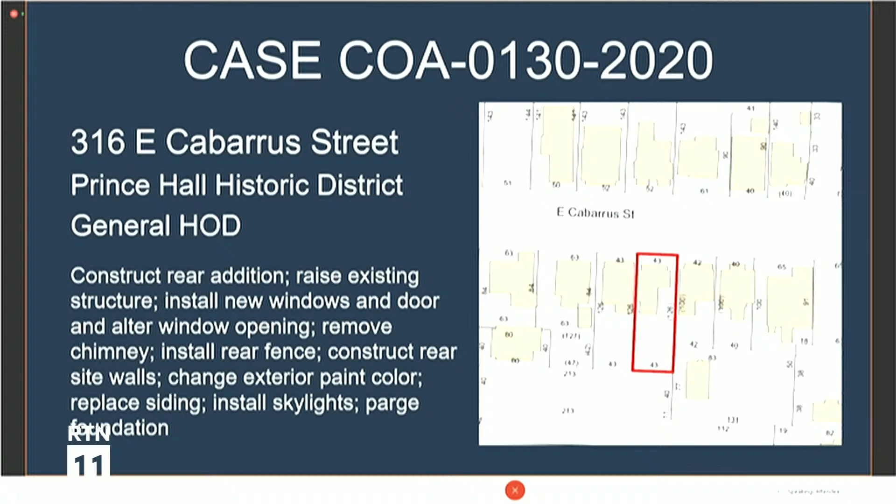This is a view of the existing structure from East Cabarrus Street. This is a view of the west property line side elevation. This is a view of the front and east elevations of the existing structure.

This is a view of a piece of the rear of the original house and the L addition. This is an early addition, and what you're seeing are the remnants of a 1950s addition that was removed by a previous owner prior to this application. Next, a view of the rear lot where you can see the significant grading changes that we'll be discussing tonight.

Staff suggests discussing the following: irreparability of all historic wood siding, bold contrasting finish colors on the addition, relationship of solids to voids in the new addition, the monolithic treatment of the addition's gable ends, extensive regrading in the rear yard, and congruity of the rear concrete terracing. Also, congruity of the green roof, congruity of the screened courtyard and plantings, and the increase to built area and built mass, and to defer the application to allow the applicant time to provide additional evidence and respond to committee comments.

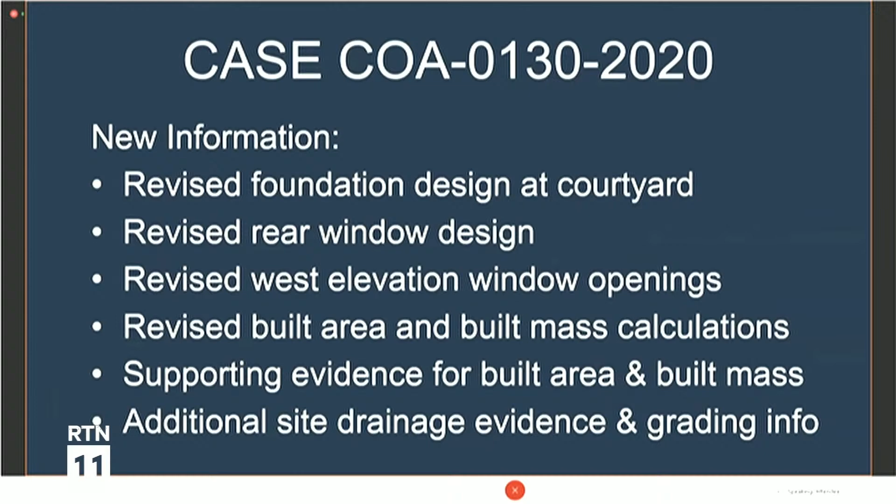That's all from the initial staff report. The applicant has provided several new revisions in response to those comments and comments from DRAC, including additional isometric views of the site, removal of the rear concrete terracing from the application, a revised front door design, original wood siding retention information, revised addition roof trim details, revised foundation design at the courtyard, revised rear window design, revised west elevation window openings, revised built area and built mass calculations, additional supporting evidence for built area and built mass in the historic district, and additional site drainage and grading information.

The applicant has a presentation for you as well.

At this point, is staff nevertheless still suggesting the matter be deferred for additional comment or additional time for the applicant? I feel that a number of the comments have been addressed with the new information, and if the committee is comfortable during the discussion, we could find a way to make a decision. Okay, thank you for that.

Mr. Barnes, Mr. Hoffman, who wishes to speak next? This is Zach Hoffman here. I'll start and run through the presentation. I believe I'll turn it over to Mr. Barnes at the end of it. Thank you for that. Please proceed.

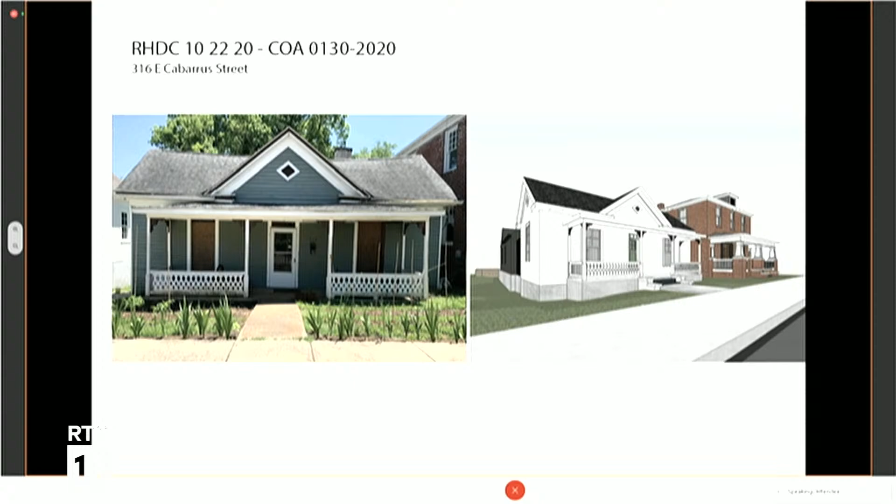On behalf of our clients and us here at In Situ, thank you for your time tonight. I will try to be very brief. We've provided a bunch of information and tried to respond to COA comments from last month, conversations we had with DRAC, and a series of conversations we've had with RHDC. Next slide, please.

Just real quickly, I wanted to give updated aerials of where we're at. You will see a lot of these changes in the updated elevations, but to highlight a few, we've stepped in the courtyard space to provide a clear distinction from the original house. We've also tried to divide the rear south-facing bay window into 3 divisions per DRAC comments, and removed terracing walls. Next slide, please.

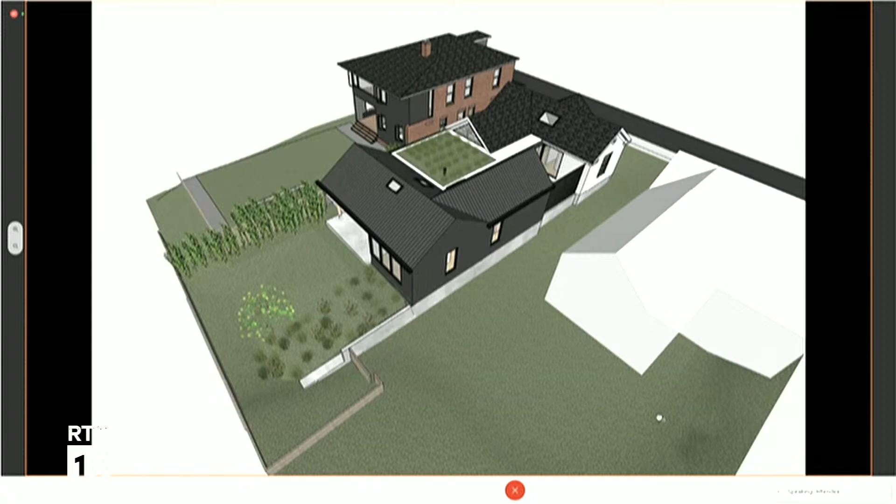This is a view from the northeast. You can see the green roof tucked in between the addition and the original house. Just wanted to provide this shot as a good part of this. The discussion tonight will be around the green roof. Next slide, please.

These are just 4 elevations coming up over the next few slides that replace the original submission. This highlights a change to the front door, working with staff to redesign to something more period appropriate. We've switched to a solid door with a single panel that has a 2/1 window in the top. Next slide, please.

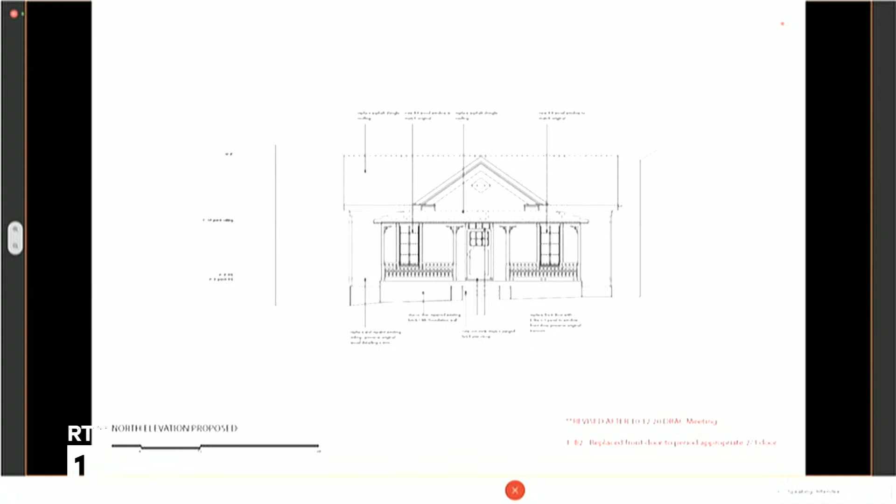This is the east elevation showing the step in at the courtyard. We have introduced trim details reflecting a minimal traditional flat trim style at the request of DRAC along the addition's gable ends, and we've stepped the extension of the foundation wall so there's a distinction between the addition and the site wall. Previously, we had the vertical siding running all the way up to the roof finish, and we've introduced a flat trim style in concordance with the minimal traditional style that was built around the first quarter of the previous century, as a nod towards the original style while also providing a distinction.

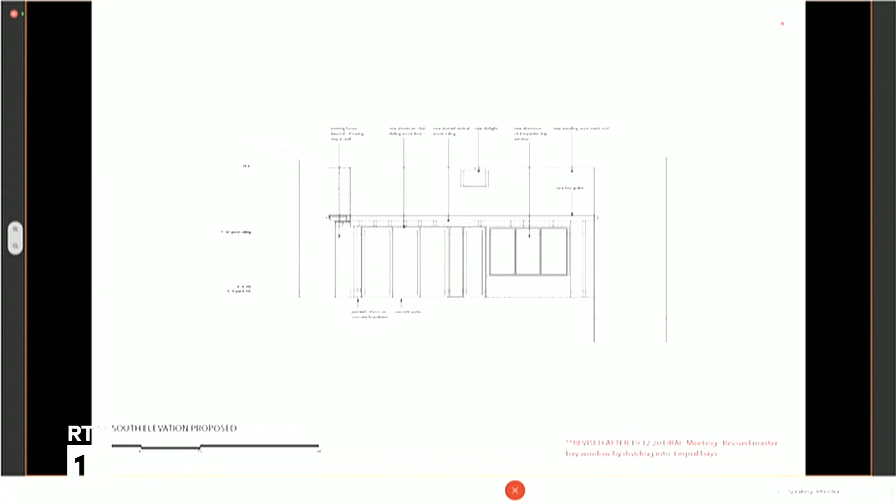The main change on this elevation is highlighting the large piece of glass that was in the master. The bay window has now been divided into 3 distinct divisions. Next slide, please.

On the west elevation, one of the comments we received in DRAC was about a portion of wall from the gable end extending all the way to the ground, and we have introduced that on the north side of that gable end. This also reflects the new trim style along the gable. Next slide, please.

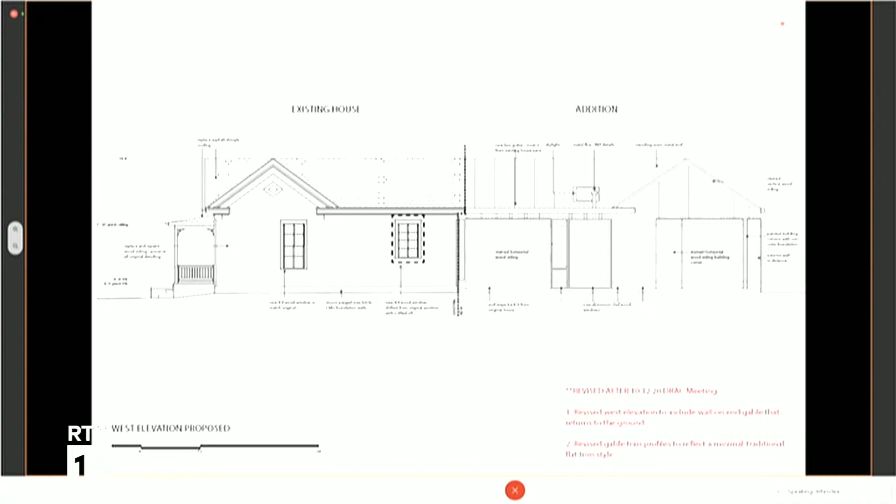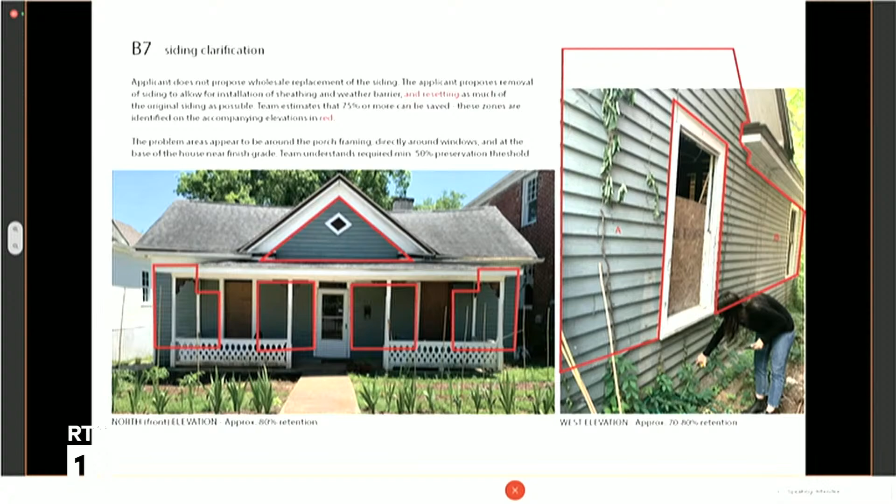One thing we wanted to clarify in our application, which we were probably unclear about previously, is the discussion around the existing siding. Our goal is to keep as much of the siding as possible. We expect that somewhere in the neighborhood of 75% of the original siding can be saved. The request we were making in the application is not to dispose of it, but to take it down, apply plywood for lateral stability, and add a weather barrier, which the house currently does not have—adding life to the siding and preserving health and safety for the clients as they renovate. These next few slides just show large batches of areas that, after an inspection, we believe could be saved.

The next thing we wanted to discuss was that, at the request or suggestion of RHDC, we looked into the Sanborn maps to look at the original house. It turns out that the original house, prior to the 1950s addition, had an additional room right to the east of the L in the original house, and also a shed on site. So our calculation of built mass for the original house is a little different than it was last month.

This is just showing 1909 and 1914 respectively. Next slide, please. So this is showing, to the best of our ability—obviously the Sanborn maps are slightly different each time, but we scaled it up—we estimate there's about an additional 325 square feet or so of built mass from the original house. That brought our current built mass up to 22.4%.

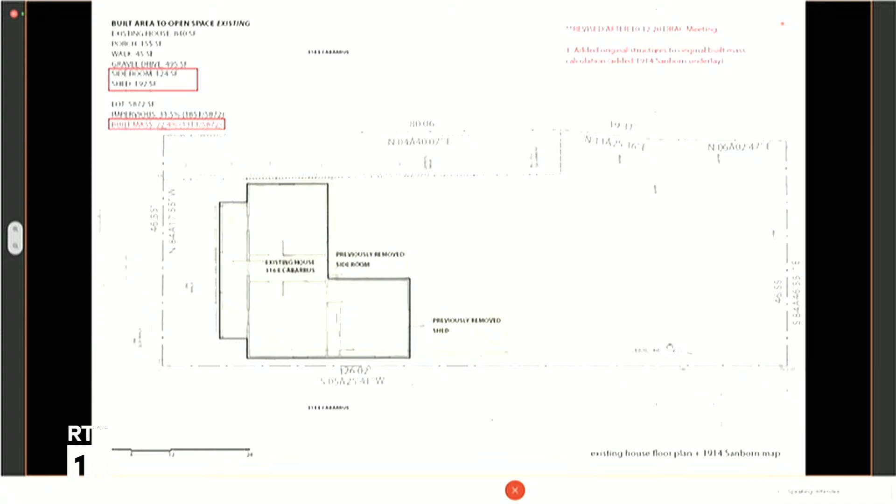Next slide, please. So we did revise the built mass for our proposal as well. We removed the terrace walls from the calculation. We did add the retaining wall, which we had forgotten to include previously, and then we added the courtyard, since it is lifted, to the built mass calculation, bringing our total up to 41.7%.

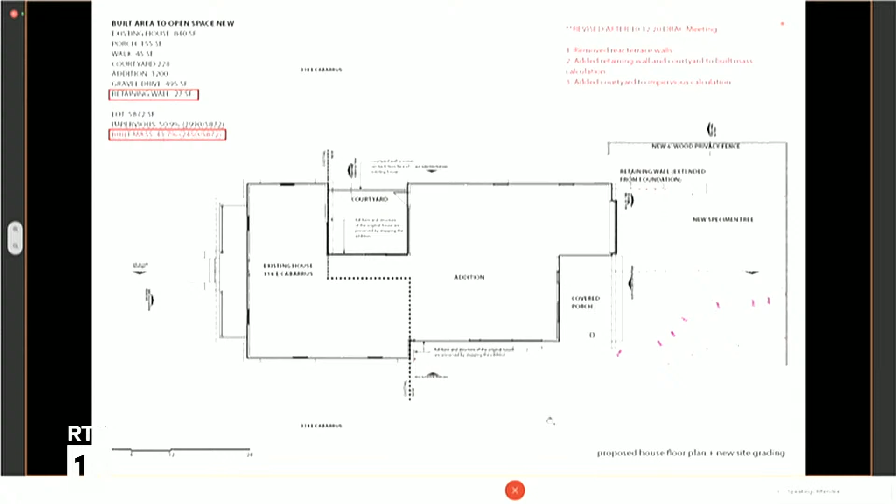Next slide, please. So at its worst case, at 41.7%, we started looking in the district for comparable conditions where built mass occupies somewhere in the neighborhood of 40% of the lot size. We found 4 examples nearby. The 2 houses to the east of us, prior to the addition, had something in the 30s, and are both somewhere in the 40s after the addition. So that's in line with what we're proposing.

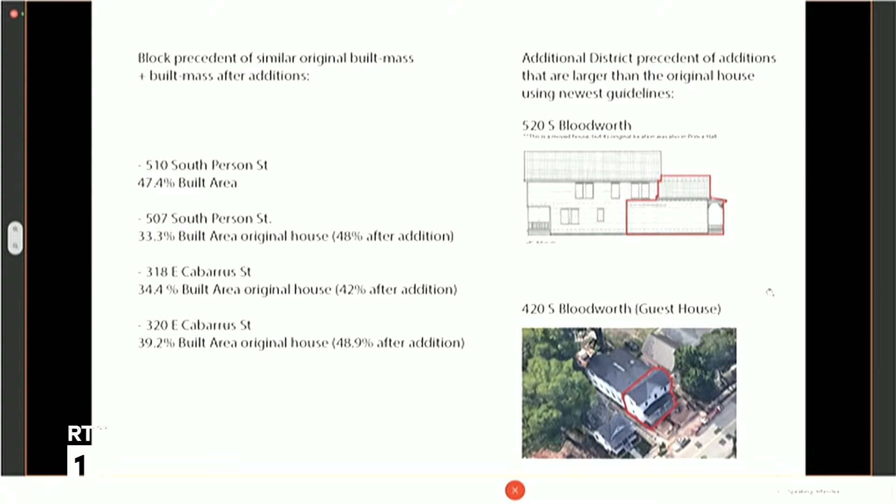Also along Person Street, just to the west of us, there were 2 properties where the original structures held upwards of 40% built mass. The 2 examples on the right are examples in the district where an addition is larger than the original house. The asterisk on both of these properties is that they have been moved to their current locations. We acknowledge that, but 520 South Bloodworth was only moved 2 lots down and has always been in Prince Hall Historic District. Next slide, please.

So this is getting into some of the built mass calculations and our conversations at DRAC. One thing they thought we could consider is the green roof and courtyard space as offsetters of the built mass of the home. Our intention with the addition from the beginning was to mimic the form of the original house and provide flat roofs to connect the two volumes, so that the clarity of the original house could be seen, but also so that the addition would be comparable in scale and size to the original house. We didn't want to provide something for our clients that was much larger and out of place.

So with the green roof and courtyard accommodating those square footage changes, we end up with about a 10% reduction in the visual representation of the built mass, bringing us somewhere around 33%. And as I mentioned at the beginning, this was at the suggestion of DRAC. Next slide, please.

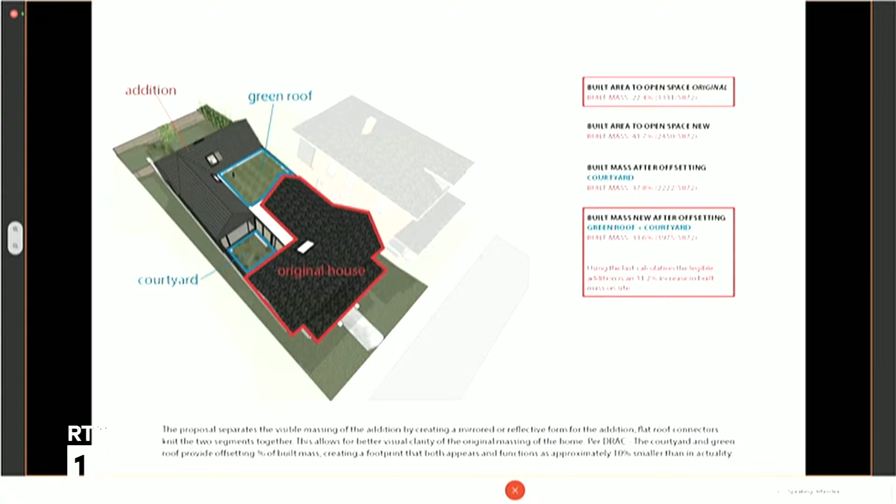So going into a little more detail about the green roof, I know staff has concerns primarily because there's never been a green roof approved in the historic districts before, and we acknowledge that, and we're hoping we could be a good precedent for how you could do this in the future.

We did want to point out that modern sustainable tech has been approved in the district before in inconspicuous locations with solar panels, so this is just a different avenue to pursue sustainability. Our hope with the green roof and courtyard, as Richard will speak to, is to handle a lot of the site water and runoff and control it, contain it, and use it rather than continue to exacerbate problems happening between the two houses.

We're about 2 feet off of 318, and there's a large gravel driveway that currently collects a ton of rainwater between 316 and 318 and delivers it to a pond location at the bottom of the hill. With the way we've pitched the roofs, the courtyard, and green roof, we can collect somewhere between 50 and 75% of all water that hits the house, and we plan to have a cistern in the crawlspace that handles this.

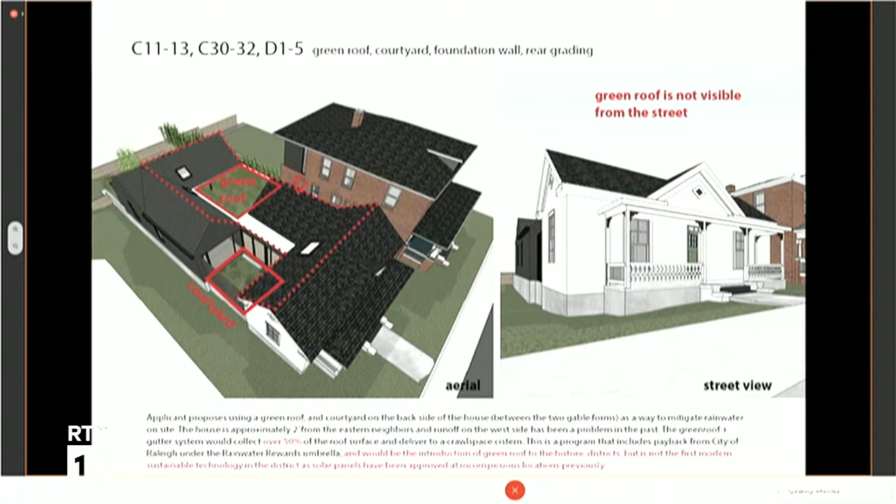This is just a shot of the courtyard. It's about 230 square feet. It would collect water through a French drain system and take it to the cistern as well. The courtyard also provides an opportunity for a hyphen between the original house and the addition, and we propose a wood screen to maintain privacy that's set below the water table, so the original form of the house remains the distinct character, and it could be removed at any time down the road.

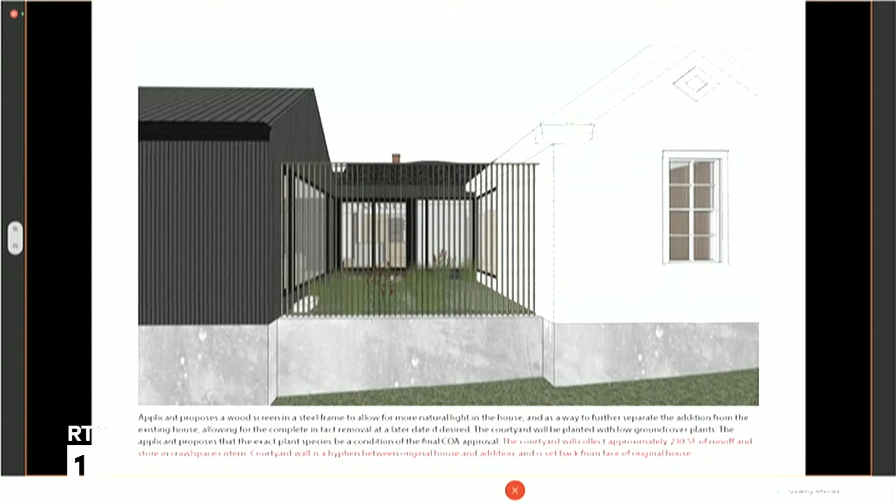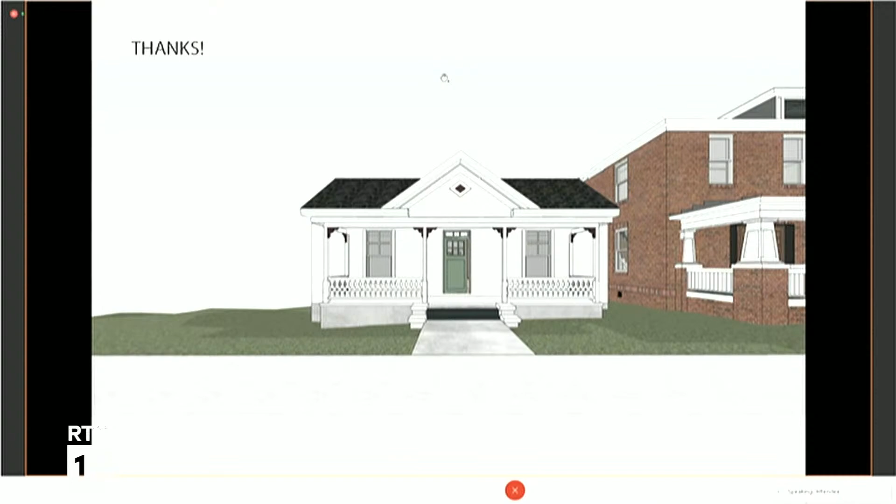And with that, I want to just thank you guys again for your time, and maybe slide it back up two images to the pictures of the area ponding and turn it over to Richard. Thank y'all. Oh, one more down from that. Yeah, either slide is fine.

Let's see. Yeah, my name is Richard Barnes. I'm the homeowner at 318 East Cabarrus, next door to this project. I'm a general contractor in Raleigh. I've been building homes and renovating houses in Raleigh for about 20 years now.

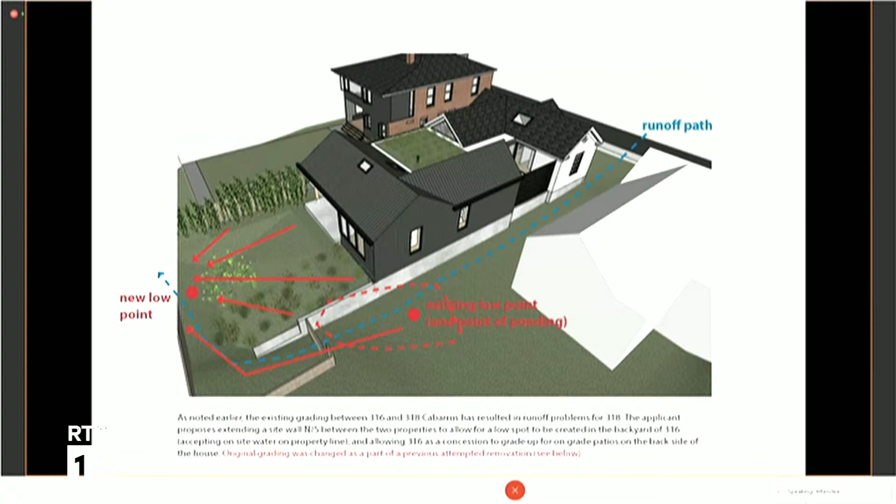So it's not going to end up in the basement of either house. And that's all I have. I'm here in support of the project and the mitigating factors they're proposing to reduce the rainwater runoff, the courtyard and the green roof, and the extension of the retaining wall in the back.

Thank you for that. With that, we'll turn to questions for Mr. Hoffman or Mr. Barnes or Aaron from members of the committee. Who has a question? Ian Dunn, I saw that hand first.

What happens to the water once it reaches this low spot? I think the hope is that increasing the built mass contains more of the water that hits the property in general. Obviously, anything running downhill is going to find the lowest spot, but we are hoping that at a future stage, the plantings in that area would allow essentially a bioswale, the opportunity to hold water and release it at a slower speed into city drainage.

And mainly the stuff through the house, collecting in the cistern and using it on site. Okay, thank you for that. Further questions, Ian? All right, nothing. Versailles Height, you had questions?

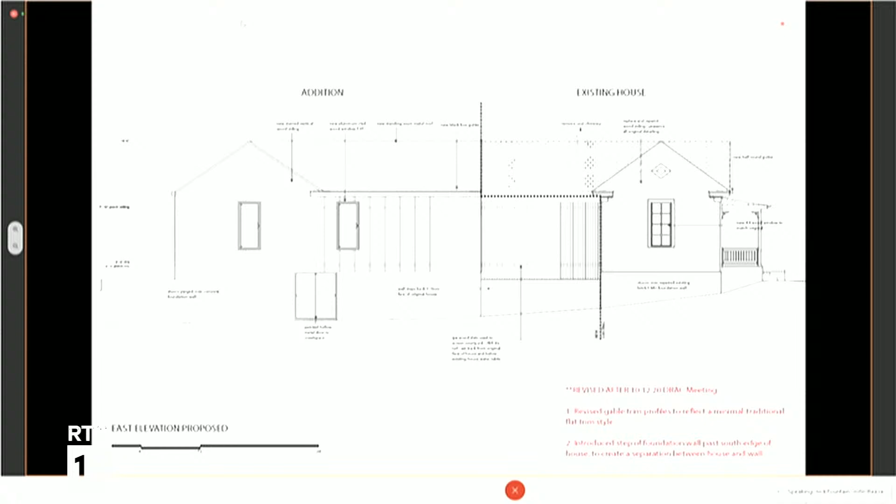Right, no, I was thinking about how much of that do we really have to have? Exactly. Okay, I got that. Because everybody's seen all of that they want. And we can pull that down.

At some point, I want to put back up the one that shows the green roof and the courtyard so that we can have that discussion. Are there further questions for that? That's Ian Dunn.

In regards to the siding, I'm glad that y'all are taking steps to save the siding. Have you explored ways to insulate the building without taking the siding off? You taking it off causes me pause, as I don't want to end up in a situation like a ship of Theseus, where everything's taken off and at the end of the day only half a dozen original boards are put back up, but you can say it has original siding. So have you explored ways to do it without taking the siding off?

I know it's possible. We have consulted across the industry as well as with building scientists about possibilities of insulating from the interior using something like closed cell foam. The problem with closed cell foam is it would trap moisture between the foam and the siding, shortening the life of the siding, but protecting the folks living there. We have explored other options, I think an open cell foam or putting a weather barrier on the inside. All of these have mainly impacts to the health, safety, welfare of the owners.

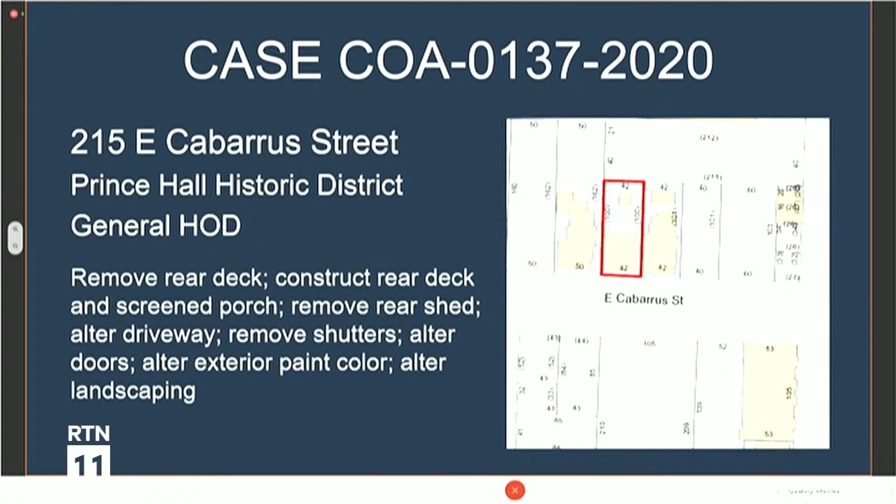This is a photo of 215 East Cabarrus from the street. A view of the driveway side, which is the east elevation. And the current existing condition of the side, well, the driveway's deferred, so we won't focus on that. This is the west elevation of the property.

And the rear, you can see the existing deck on the back of the house. And a full view of the rear elevation of the house. And the existing shed located near the rear property line in the backyard.

And the applicant made us aware that in the course of some of the renovations, siding replacement has already begun. This is considered routine maintenance at this point to the existing structure. Staff suggestion is to discuss the merits of a 365-day demolition delay for the removal of the rear shed, and to approve with conditions.

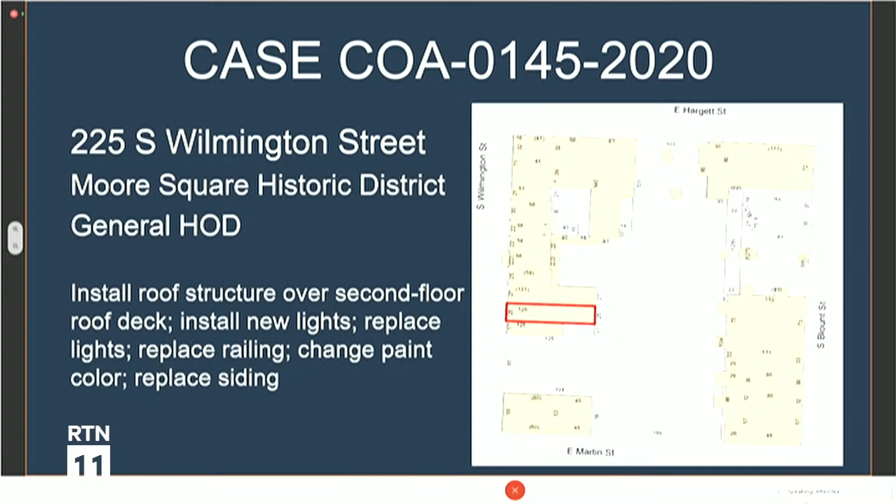Next slide. This is a view of the property from Wilmington Street. Next slide.

So across the street, a little further down, this is a view towards the property. It is not the building immediately on the end, it's one in. This is to illustrate what you can view of the roof area, which is part of your discussion. Next slide. And then this is another photograph a little closer, also across the street. The building in question is the second in.

So staff's recommendation is to discuss the visibility of the proposed canopy structure and whether or not it compromises the character of the historic district. Pending the results of that discussion, approve with conditions. There was some information provided, which you should have seen. These address some of the concerns mentioned in the staff report - drawings illustrating visibility and photographs from Wilmington Street.

Okay, who would like to speak first for the applicant? I will. This is Meredith Kirkpatrick. I provided the additional building section, sightline section from the street, and also the photographs from Wilmington Street to address staff's comments about visibility and to indicate that it is not visible from the public right-of-way. I'm here to answer any questions you have about that.

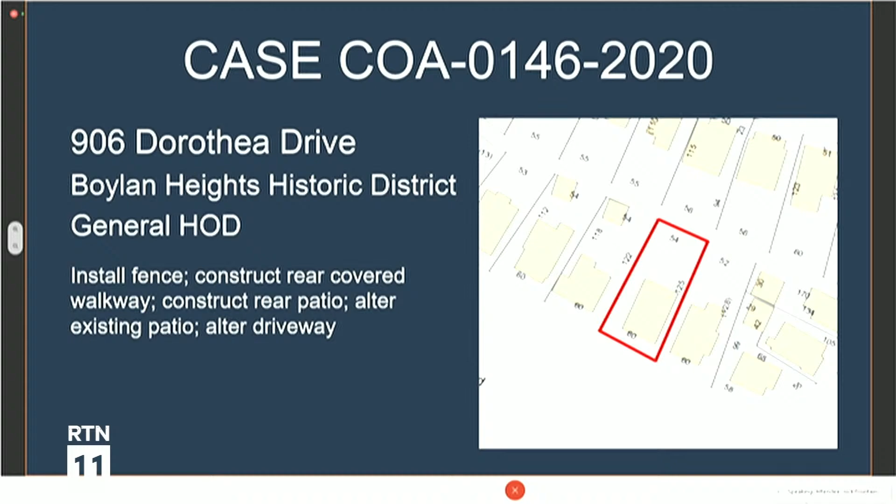This is case COA 146-2020 for 906 Dorothea Drive in the Boylan Heights Historic District. The work description is to install a fence, construct a rear covered walkway, construct a rear patio, alter existing patio, and alter driveway.

This is a view of 906 Dorothea Drive from the street. This is a view of the east elevation of the house. And a view of the existing rear elevation and gravel patio area abutting the house.

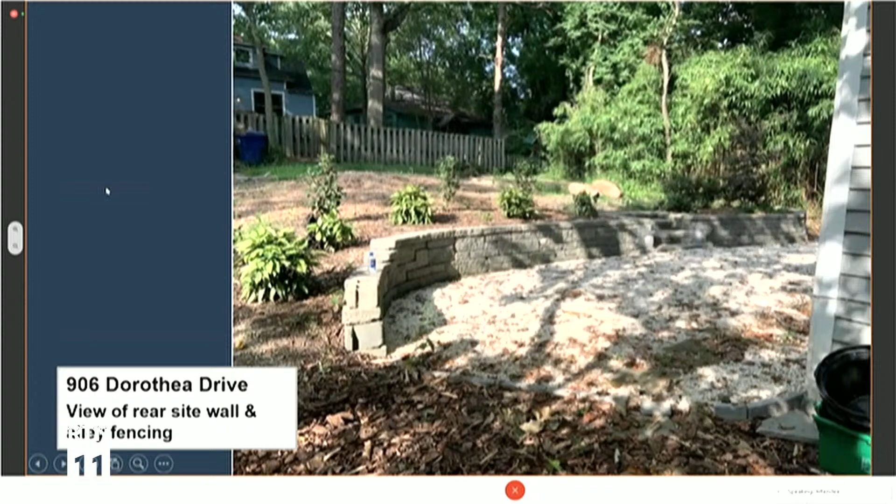This is a view of the rear yard where you can better see the existing gravel patio and retaining wall, as well as looking back towards the alleyway that runs behind the property. This is a view from the rear of the property, looking back towards the house across the full yard.

This is a different angle from the rear alley, and you can see the existing rear parking area that is proposed to be expanded and covered. The staff suggestion is to approve with conditions. The applicant has provided new information for the meeting, consisting of a revised rear fence design and supporting evidence of a previously approved covered walkway in Boylan Heights.

Aaron, I'm going to come back to you, and I would like to see what the findings were with respect to the other covered walkway from a couple of years ago that I think the applicants have called to our attention. But at this point, I'd like to hear from the applicants anyway.

Mr. Rebecki or Mr. LaBelle, who wants to talk about the proposal? Mr. LaBelle will be talking. Thank you for your time this evening. It might feel like a few years ago, but the covered walkway was approved in January of this year and was constructed since then as well. So this, to us, kind of breaks down into four areas: the brick and gravel driveway, the fence.

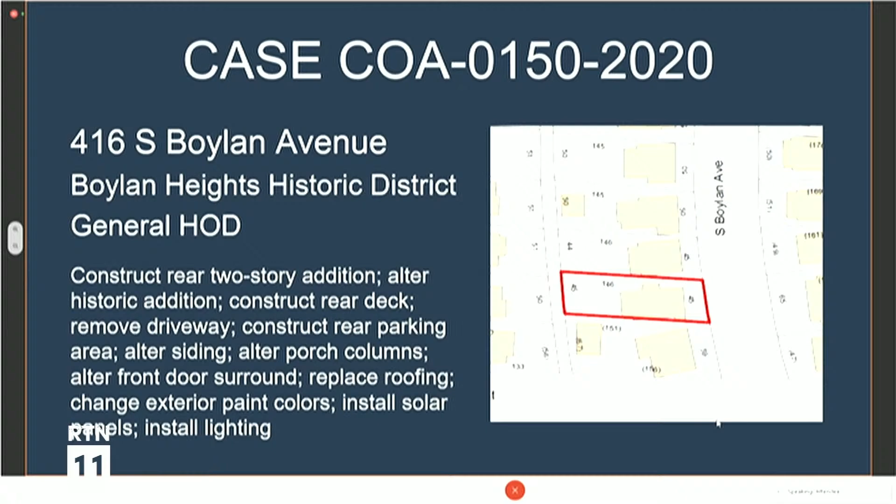This is a view of 416 South Boylan's front facade. You can see the brick veneer on the front porch.

This is another partial view of the front facade where exploratory demo has already been underway on site to determine the deterioration of the original wood siding beneath.

This is a view of the north elevation. Working our way down the north side, right towards the back, you can see a portion of the one-story addition to the rear.

This is a view of the full rear facade of the house from the existing rear alley. This is another view of the rear addition. This particular portion was the second of two additions.

And a view of the south facade, working our way back towards the front porch.

Staff suggestion is to discuss the following: proposed alterations to the historic one-story addition, proposed built area increase, evidence for historic siding replacement, and proposed solar panel location. Staff suggestion is to defer to allow the applicant to provide built area mass calculations and evidence of window and siding deterioration beyond repair.

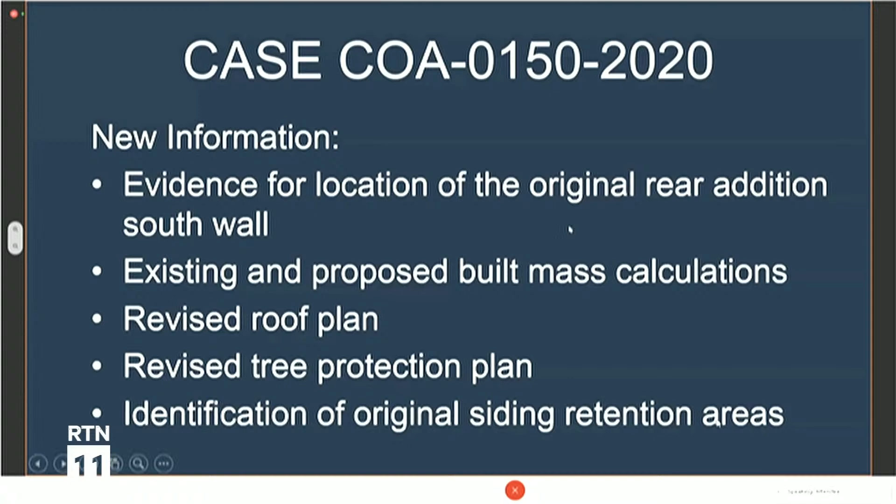We've received lots of new information for this case addressing some of the staff comments, including evidence for the location of the original rear addition south wall, existing and proposed built mass calculations, revised roof plan, revised tree protection plan, identification of original siding retention areas, confirmation of original window retention, landscape lighting location information, removal of solar panels from the request, additional finish details, and revised plans and elevation drawings.

That's all. I will note that this was an application that would have been required to attend DRAC were it back up and running virtually at the time of application, and that has been waived. It has been waived by you folks, you mean? Yes. For projects with large additions, that's usually an automatic requirement to attend DRAC. But with COVID, DRAC was not up and running virtually before we received this application, and as a result, we waived the requirement to attend DRAC.

Okay, but in any event, it hasn't been there. Okay, Meg McLaurin, we'd be glad to hear from you and have you walk us through what all you changed since the original.

To those of you who may have read through the entire application and all its iterations, please know I did not make it hopelessly long on purpose. From the time of the first submittal in early September, several items have been revealed by the partial demolition we've done of things we knew were not original. The structure seems to have been most recently several apartments, although it's been vacant for more than 10 years. The owner is hoping to restore it to single family usage and is prepared to restore the original main structure and bring it into the 21st century in functionality.

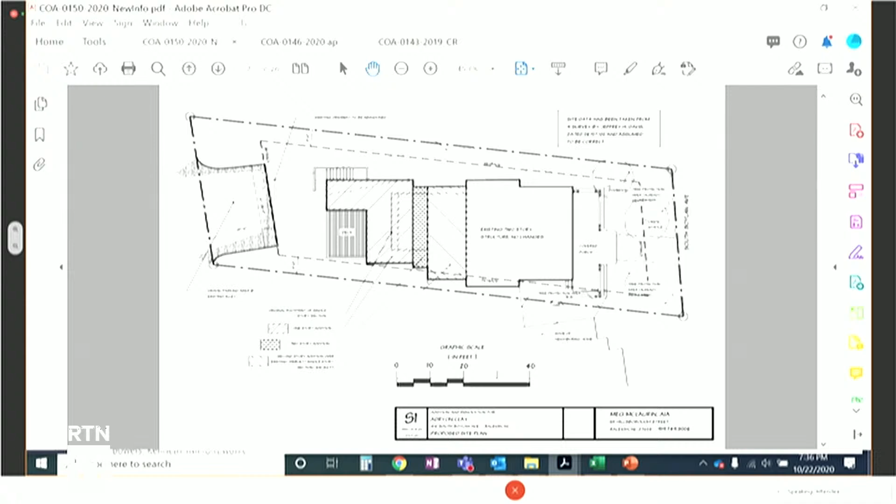Okay, and I'm sorry to interrupt again. I guess I think that piece that you're calling the first addition, I think that was actually there. I think that was part of the original structure. But it doesn't matter, Meg, because she's counting it as the original anyway. Okay, well, if it doesn't matter, then it doesn't matter. But I think that there was actually a single story piece originally on there. Okay.

All right, so then, Aaron, then what you did was calculate what we see as existing two-story and the single-story addition, and then you calculated everything beyond that to get your numbers now. Is that right, Aaron? That's correct. So that initial one-story portion is considered part of the original calculations. Whether it was original or early, it's historic. Either way, it is counted for this purpose.

But are you saying that something that's there is not part of the... you cannot count something that's actually existing as part of the original? So Meg, it depends on whether that piece of the structure existed during the period of significance of the historic district, that's the first measurement. And it appears that the rearmost smaller room, where you can see the current exterior rear porch, was not constructed prior to or within the period of significance, but was constructed at a later date.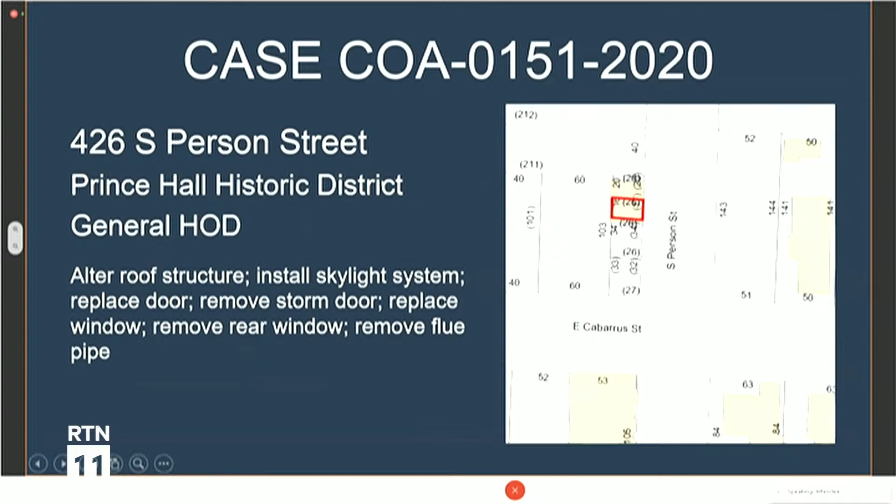I would also like to add that the applicant, as listed on the application on the agenda, has since left the company. So the speaker and applicant for tonight is another representative from the company.